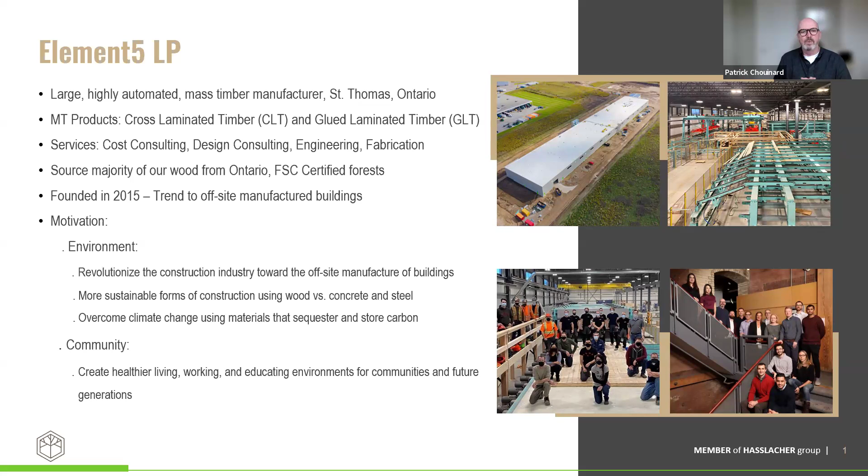We're in fact using our forests to instead remove the carbon dioxide from the atmosphere and store it in the form of these lovely buildings. And also for communities. I wanted to create healthier living, working, and educating environments for communities and future generations.

So the two main products that we make, these are called mass timber products. We make cross-laminated timber, or CLT. These are massive solid wood panels. We make a wooden panel that's up to 11.5 feet wide by 53 feet in length and up to 15 inches thick. And these are considered an environmentally friendly alternative to concrete.

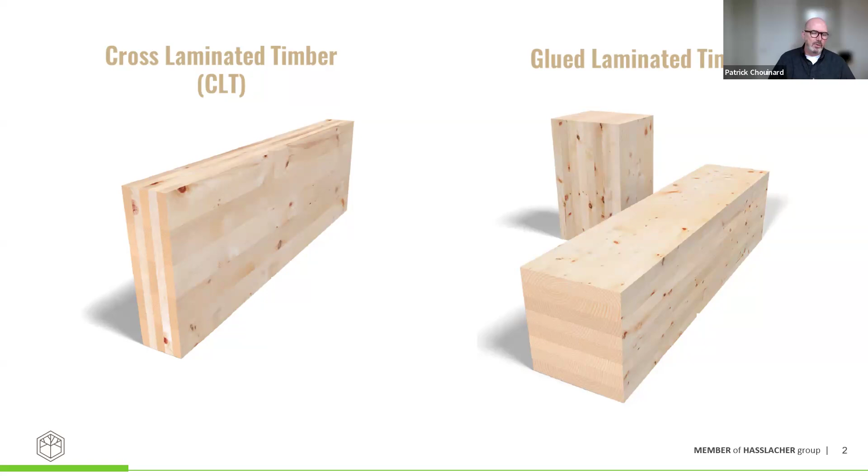And then on the right, we make glued laminated timber. So these are laminated members that we use to make columns and beams for buildings. And those two components combined form the skeletal structure for mass timber buildings. So on the left-hand side, you'll see a post and beam structure. And here you're seeing these solid glued laminated columns and beams, and then we're using these massive CLT panels for the floors.

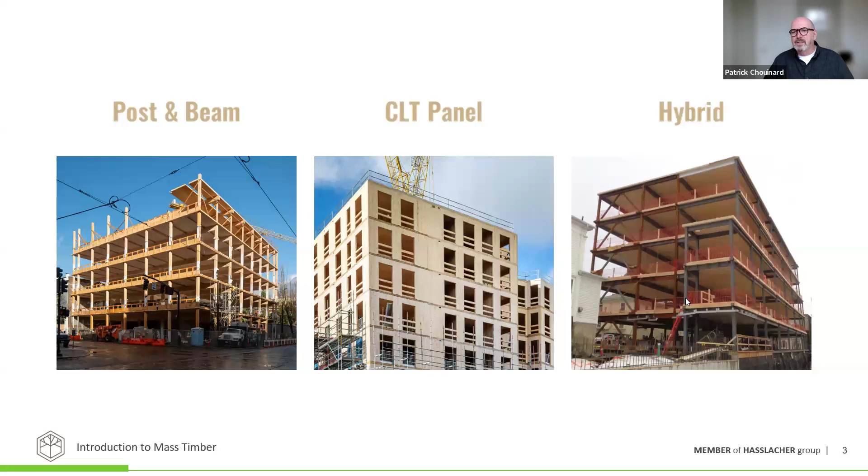The building in the middle is called a CLT panel structure, and instead of using glulam for columns and beams, we're just using the CLT panels both vertically and horizontally to form the structure of the buildings. And we're often seeing a lot of hybrids in the industry as well. So instead of glulam columns and beams, you'll see these are steel columns and beams, but CLT panels are used for the floor structure.

Even though the European market is 35 years ahead of Ontario using mass timber, Ontario is incredibly well positioned to become the center of the mass timber industry on a global basis. And Ontario's taken up mass timber in a big way. This is just a small selection of a number of the buildings in and around the city of Toronto that are in various stages of design, development, and completion.

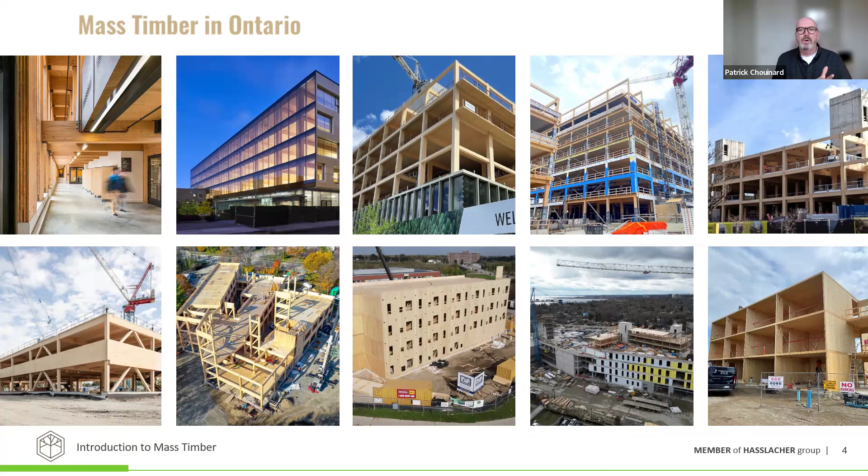Pretty much every college and university in the province of Ontario is building a mass timber academic building. And today, we can build these buildings in Ontario up to 12 stories. And as of January 1, we can build these buildings up to 18 stories.

We are currently experiencing a housing crisis in Canada, as you may be aware. It's all over the news, obviously. And CMHC, the Canada Mortgage and Housing Corporation, says that we will need 3.5 million additional housing units by 2030. This is in addition to what is already slated for construction.

Right now, we are experiencing record high demand for housing, however, record low supply, making it harder for Canadians to afford suitable housing. And then there's a lot of macroeconomic factors that are in play at the moment. Very high cost of construction, labor shortages, high interest rates, government fees, and a ton of red tape.

We view the housing crisis as fundamentally a supply problem. Demand exceeds supply, which is driving up the cost of construction. And our approach is to tackle the supply side of the problem. And our focus is on investing in innovation, investing in technology, and figuring out how we can start manufacturing housing in factories and in volume.

So at Element5, this is our, at least partial solution to the affordable housing crisis. So about 4 years ago, we decided to dedicate some resource to using this wonderful factory we have to try to help overcome the affordable housing crisis. And the thinking there was that we design and engineer a replicable kit of parts that we can adapt to unique requirements, but essentially we're using the same architecture, the same engineering, the same components, the same connection details, and we're delivering the same building over and over again. So the idea of mass customization and replicability.

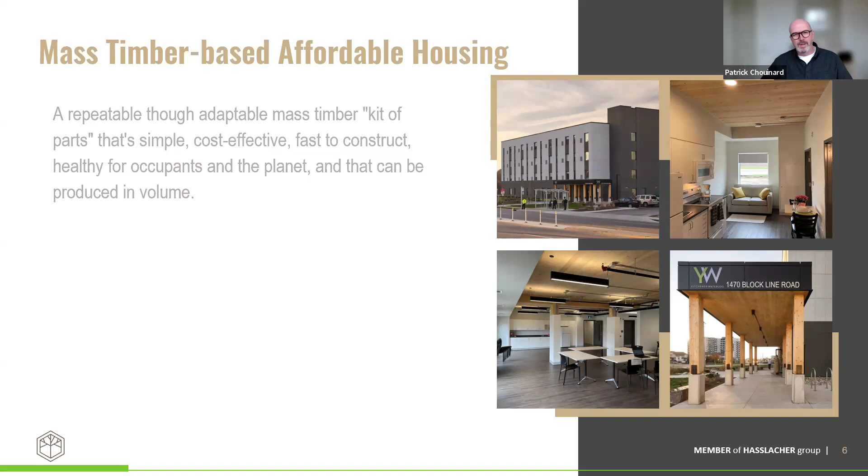So 4 years ago, that was just a theoretical concept, and we've been quite successful over the last 4 years. So in 4 years, we have delivered 10 affordable housing projects in different locations, and we have a ton of others that we're currently working on. And so we've been able to use this offsite manufacturing really to help overcome at least a portion of the affordable housing crisis. Most of the buildings that we're doing today are supportive housing to help people at risk of homelessness. And that's partly because that's where we see the greatest need in the industry, but we're also using it for market rate housing and other larger buildings.

So I'll just touch upon some of the ones that we've done so far. This one on the top left-hand side, this was our first building. This was for the YWCA in Kitchener. And this was for single women at risk of homelessness. The second building we did was almost exactly the same building, but 2 stories versus 4. But this one was for men at risk of homelessness in York Region, north end of Toronto. The third one was, again, for the YWCA, but this was for single women with children. So we designed this as 2-bedroom units, smaller footprint, only 3 stories versus 4 stories.

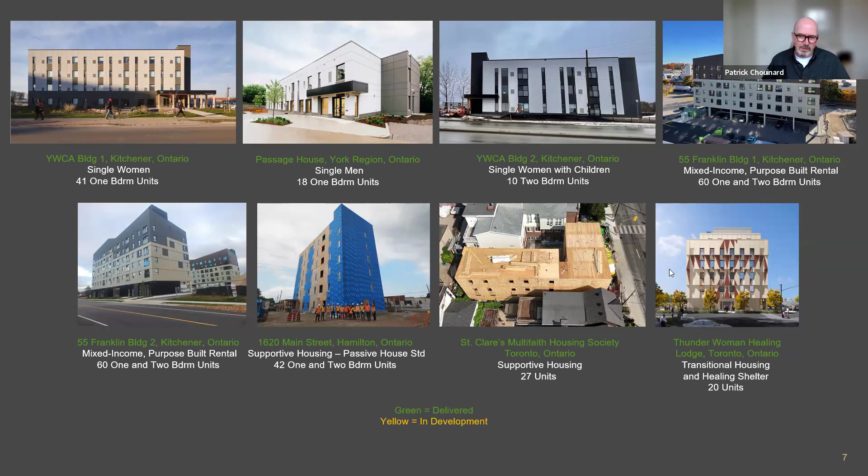And then we've recently done a few hybrid buildings, the one at the top right and the one on the bottom left. I'll go into a little bit more detail there later. This is a 6-story version we just completed in Hamilton for City Housing Hamilton, designed to passive house standard. The one on the bottom right is one we're doing in the city of Toronto, and it's transition housing for Indigenous women.

Just a few more. I won't talk about all of these. We're doing an 8-story version in the city of Toronto. We just did 5 buildings in Colorado as student residences. You may be interested in this one. This is one we're doing in Sudbury right now. We're actually delivering this building this month. It's a 5-story version of this building.

The 2 that you see on the right-hand side, we finally convinced the city of Toronto to start thinking about off-site manufactured mass timber modular housing as a potential cure to the affordable housing crisis that the city of Toronto is experiencing. And we just have these 2 buildings right now that are in various stages of design and development.

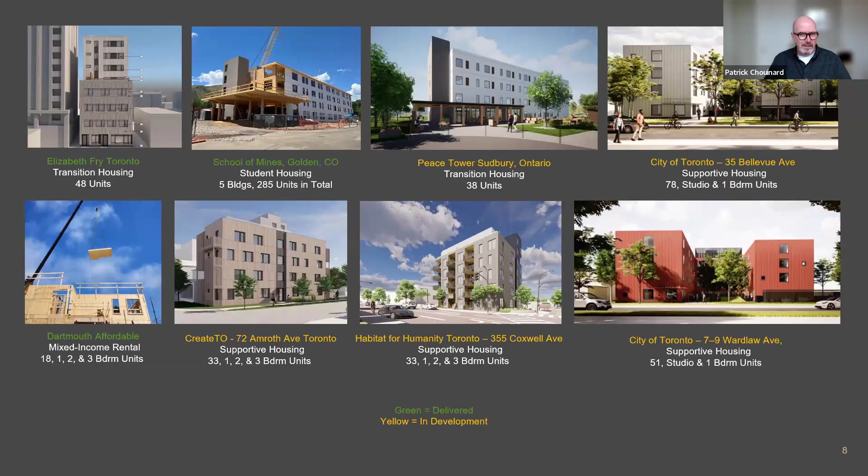So this is the first building that we did, and this is for the YWCA in Kitchener. This is the completed building, and it's 23,000 square feet. It's 4 stories, and it has 41 apartment units in it.

The way this project came out to tender was design build as opposed to design bid build. The traditional way that buildings like this come out to tender is a municipal government or a nonprofit housing organization or a developer will first design and engineer a building, then they'll put it out to tender, and then basically everybody has to bid on that building as designed. But this one came out to market as design build.

So what the YWCA did is they just said, here's the amount of money that we have to build this, here's the piece of property. And they sent it out to tender so that various organizations could put together a team to bid on this. And this is how we were able to suggest a non-traditional, innovative way of doing this project.

And so if you're thinking of, or you're in a position to go out to tender in your municipal government jurisdiction, then I highly recommend that you take a design build approach rather than a design bid build approach. And that way you'll have a number of different people bidding different structural solutions, and you'll get more innovative solutions to your housing problem in your local community.

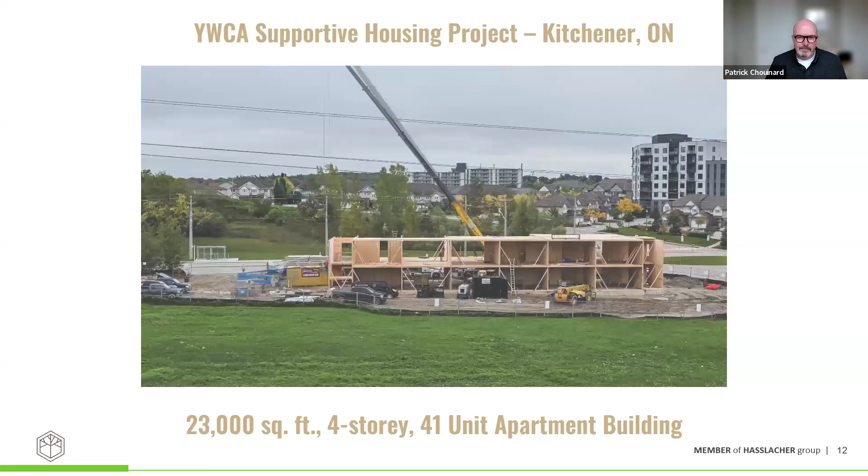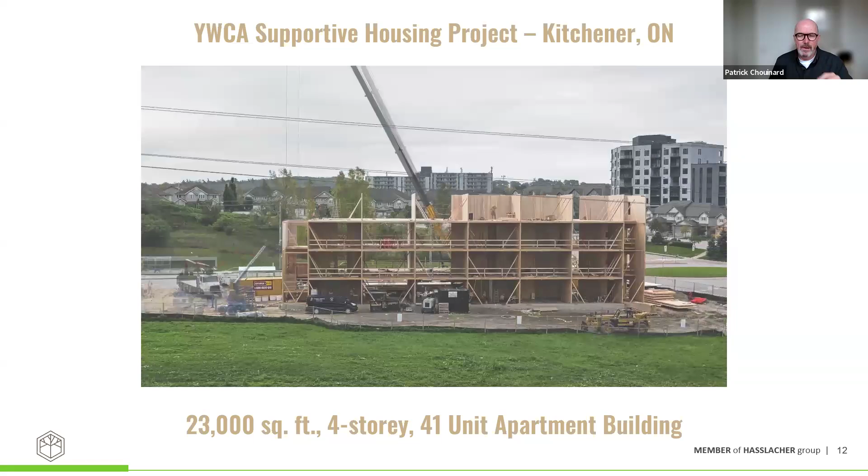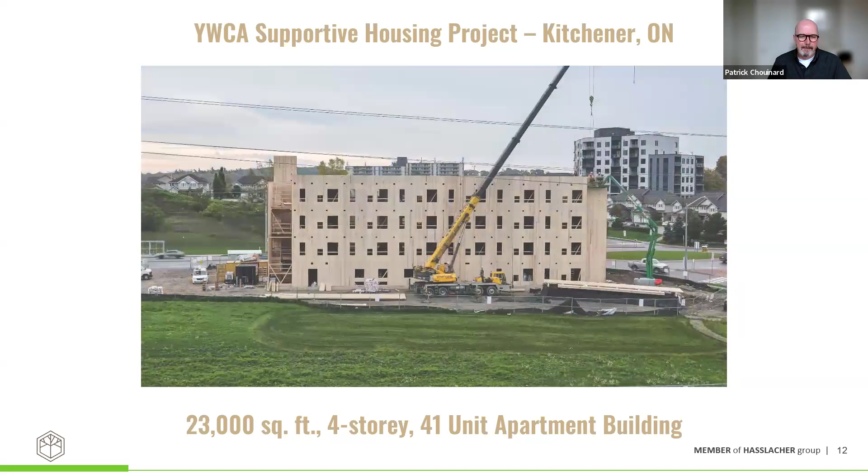So here we are. This is day 8. So within 8 days, we're able to assemble 2 floors of the building. So here we are in day 20. So within only 20 working days, we were able to assemble the superstructure of the building.

This building came out and it was financed partly by the federal government's Rapid Housing Initiative. And the stipulation of that was that to receive funds, you had to be occupied in the building within 12 months of receiving the funds. So when we proposed this as a design build solution, we had no drawings for this building at all. We had some sort of renderings of what this building could look like. And from that point until occupancy was only 1 year. So this building came together incredibly quickly.

And the way we were able to do that was with the team that we put together. We met on a weekly basis. Every week we met from early stage design all the way through until the occupancy of the building. I don't know the makeup of the people who are here, whether you've got some architectural background or engineering background, but I'll just talk a little bit about the more technical aspects of this without going into too much detail.

But when you're designing a mass timber building, it's really important to design it as mass timber from the beginning, rather than just somebody giving us a set of drawings for a concrete building and just converting it to wood. The process has to start early on. And so this is your typical floor plan.

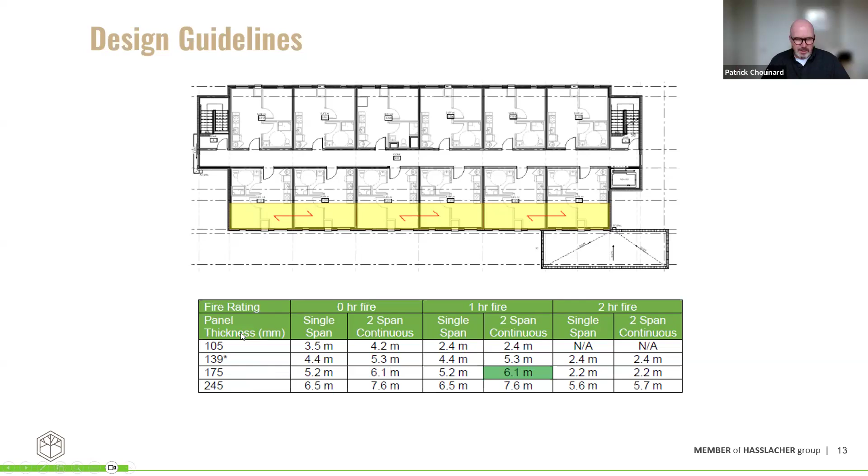And in a 2-span continuous situation where these panels span 2 units, we can span up to 6.1 meters. So that means that the distance between these black lines is 6.1 meters. And in that situation, we can supply a CLT panel that's 175 millimeters thick. If you increase the distance between these black lines, then we have to jump up to a 7-ply panel at 245 millimeters thick. And that means a lot more wood, and that means an increase in cost. So we're trying to reduce this to 175 millimeters. So most of the affordable housing buildings that we're doing are confined to a 6.1 grid pattern.

And so here we see your sort of typical 3-bedroom unit where you see these red arrows. That's where you have a structural wall. The green area is where the panel spans, across the entire length of this unit. There's really no limit on how wide you can go. So if you want a bigger unit, like a 4 and 5 bedroom, you can simply break open into the neighboring bay here and just put bedrooms and bathrooms in the adjacent bay. And there's really no limit on how deep you can go with these buildings as well.

When we make a panel, the smallest width panel we can make is 2.4 meters, the widest is 3.1. So ideally, you want a panel to be between 2.4 meters wide and 3.1 meters wide to reduce the amount of waste.

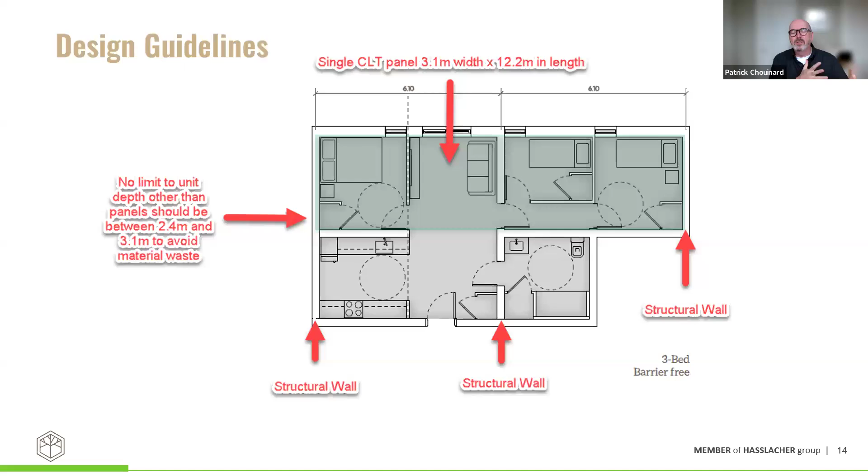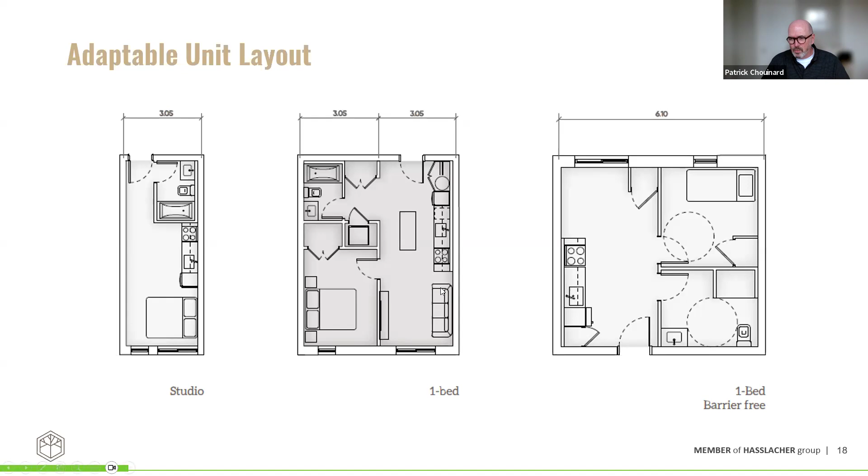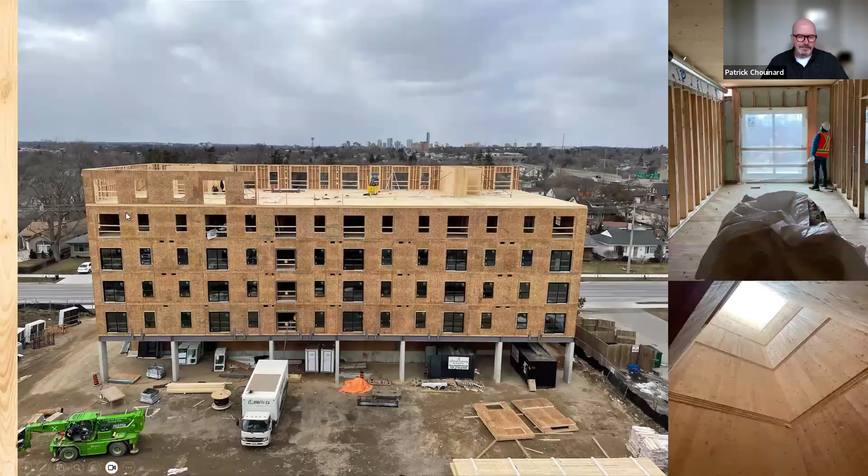This is just a few examples of the kinds of buildings we're doing today. As we got into this, we came across developers who were used to working with light wood frame materials, doing the entire building out of light wood frame materials. And then they were interested enough to test the waters and see what it would be like to start using CLT for just the floors and the cores of the building.

So instead of doing the whole structure of the building, they're doing the building in these light wood frame panels that are made by independent third parties. And they're just using the CLT floors and cores. So here you'll see the underside of the CLT panels in this room here.

And the first building that we did for them, by using CLT panels for the floors, they shaved 5 weeks off the construction schedule. And you can imagine these panels in this building are about 10 feet wide by 40 feet in length, and dropping these large panels into place, how quickly that building assembles versus using traditional I-joists.

And in addition to that, these panels are fire rated. So in order to achieve fire separation with I-joists, you have to insulate between the I-joists, then you use resilient channel, tape, drywall. And so by using CLT, they're not only faster to assemble, but you don't have to go through all of that insulation process.

And then the second building we did for them, rather than just use the floors, they wanted to use CLT elevator shafts and stairwells. So the second building, they shaved about another 3 weeks off the structure by using CLT for the cores of the building.

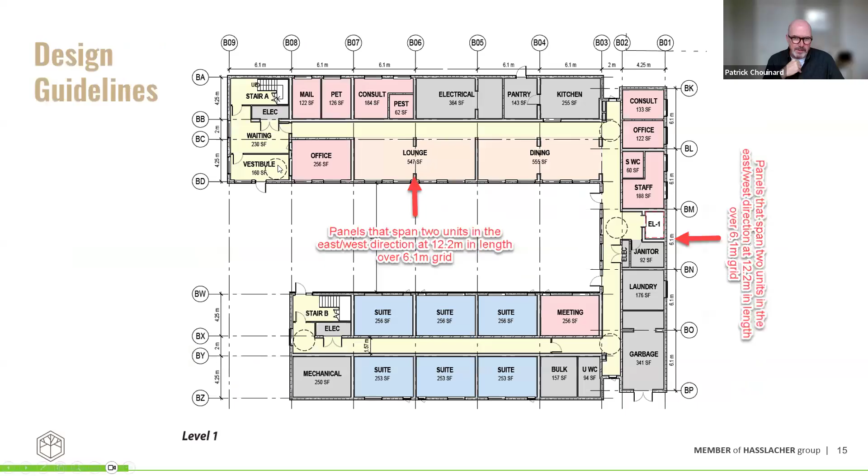So if we go back to this building here, this is the all mass timber building. So that is line item 4. That is the fastest form of construction, because it's only one structural material used for the whole building, but it's not the cheapest form of construction. The cheapest form of construction is the all light wood frame building with no mass timber components whatsoever, but it's not the fastest form of construction.

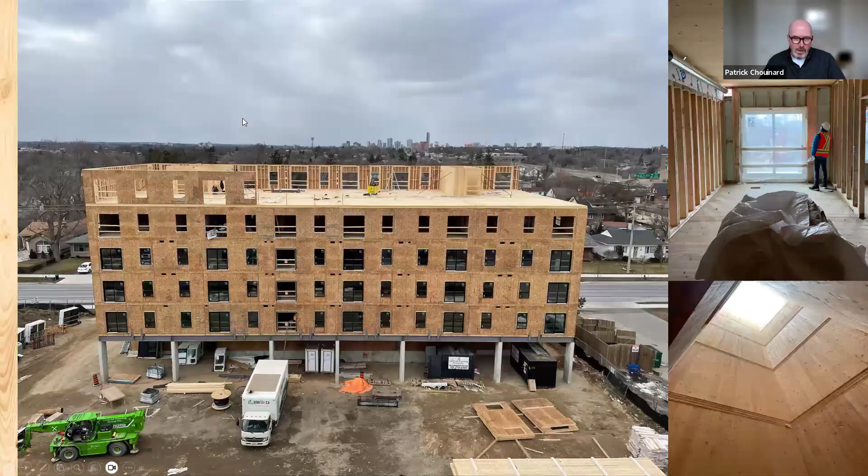The one that we're promoting now, to a large degree, is this hybrid structure. We think this is the ultimate in terms of building structure in the affordable housing sector. So this is line item 2. It's just slightly more expensive than the light wood frame option, but it's about 15 to 20% faster to construct.

And we as a company are trying to find solutions to overcome the affordable housing crisis. And so the beauty of this solution is all of these components are made in factories and assemble very quickly. So we can do about 80 of these buildings per year if we did nothing other than affordable housing.

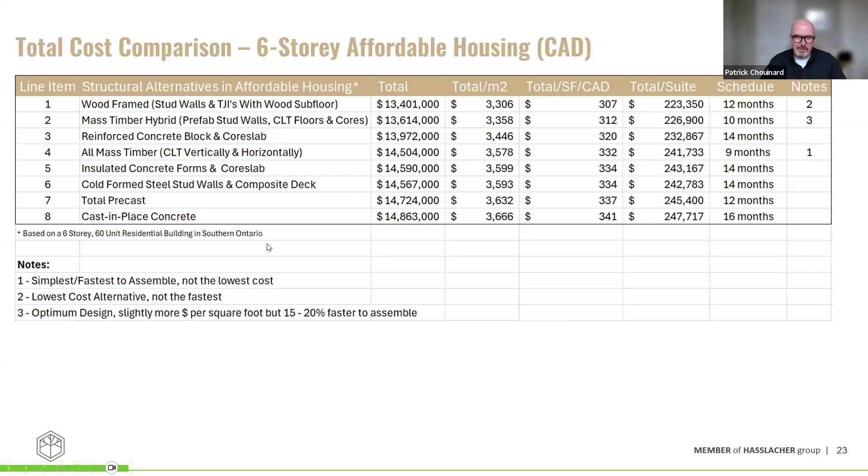Many advantages to this form of construction. Firstly, it's cost competitive. Of the 14 projects we have won so far, we've won every one of those based on price. And we've won those up against all of the usual contenders, precast concrete, volumetric modular, ICF block. And so we know we have a very competitive solution in the market, very fast to construct. You saw how quickly the building went up and how quickly the project came together from beginning to end.

We know we're creating healthier environments for occupants as well as healthy for the environment. We're able to produce those buildings in volume. We're helping to overcome the affordable housing crisis. We're using natural, renewable, sustainably harvested materials.

Because of the way these buildings come together in a BIM environment where all of the major contractors and trades are working together in a 3D model, we're looking for opportunities to find synergy between everybody and to reduce clash detection. So because of that, there's much more cost and schedule predictability. You're less likely to get unforeseen charges at the end of the project because somebody forgot something that was important early on in the design.

These are high performance buildings. Because of the thermal mass properties of wood, these buildings perform much better than traditionally constructed buildings. The life expectancy of one of these buildings is well over 100 years. These are really solid buildings.

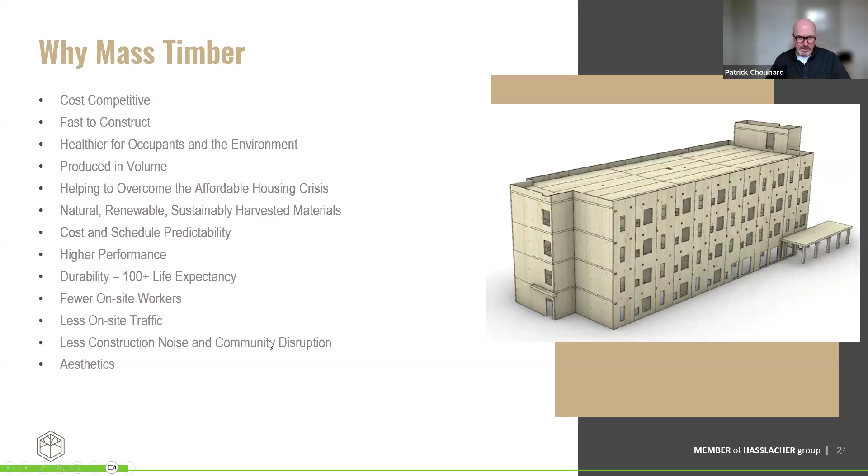We realized early on that with slight modifications to the floor plans of these buildings, we could proactively go after not only the affordable housing sector, but retirement living buildings, student residences, market rate housing, hotels, and many others. So essentially, this is the same structural solution that we can target each one of those.